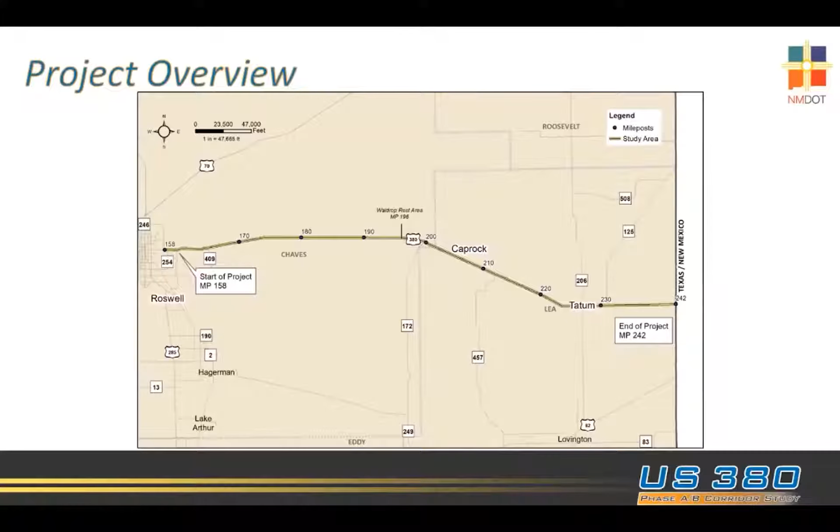Project overview. The project will commence at mile marker 158 and will proceed east and end at mile marker 242, which is at the Texas state line, over 80 miles.

The project purpose is to identify and address any existing deficiencies that might exist within the corridor, with considerations of safety, operations, access, right-of-way, environmental, public input, and costs associated with any alternatives. Project deliverables: what we're going to end up on this project is a report with any recommended improvements to the US 380 corridor. Thank you, AJ.

I'm going to talk a little bit about the existing conditions analysis that we've conducted for this project. I'll start by taking a look at the existing roadway.

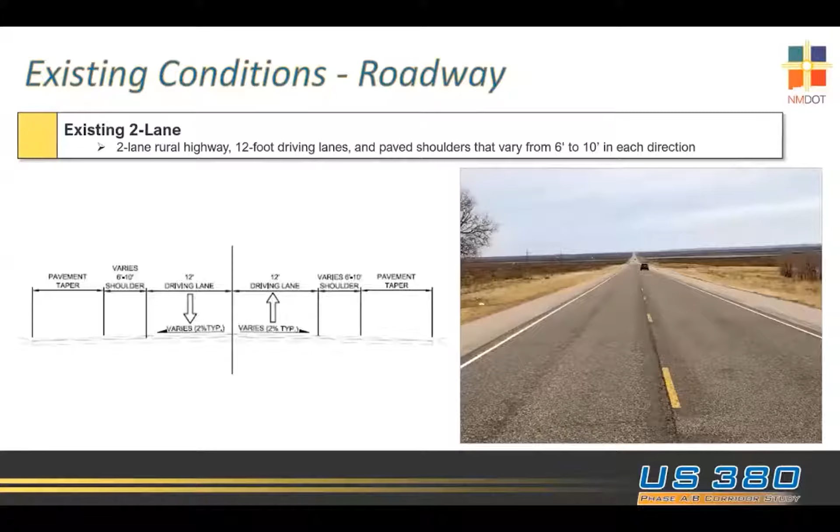Many of you probably know this corridor better than us, but we have traveled this roadway and identified this 2-lane road as a rural roadway with 12-foot driving lanes in each direction, 6 to 10-foot shoulders, and pavement tapers on the outside which provide for a safety zone.

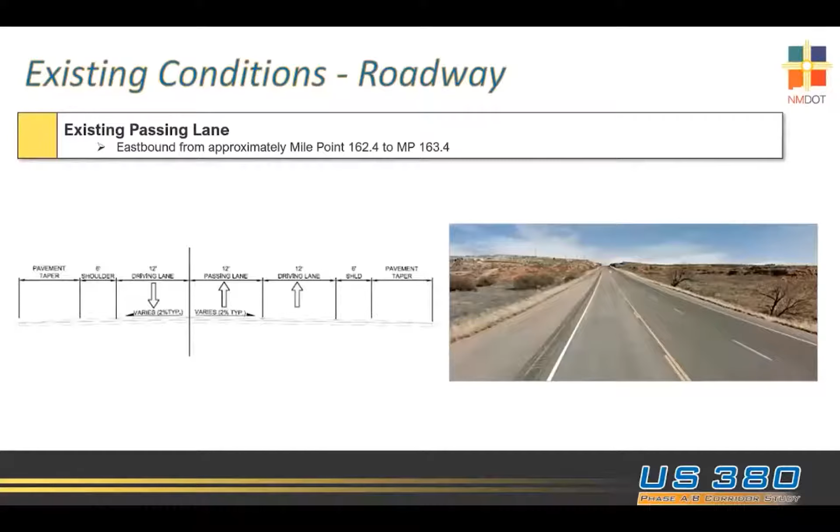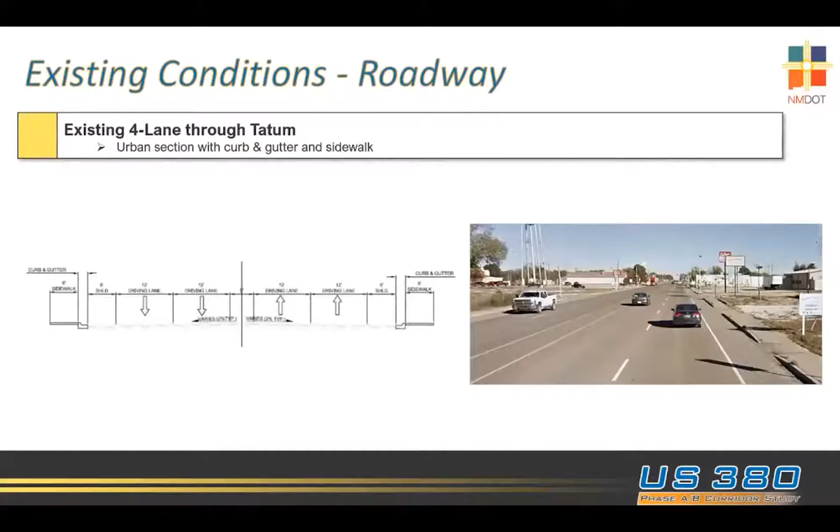There is one section between milepost 162 and 164 that is a 1-mile-long passing zone for eastbound traffic. There is also a 4-lane section through the community of Tatum, with 2 driving lanes in each direction separated by a 5-foot painted median, curb and gutter, and sidewalk on the outsides.

As we looked at this corridor, we took a look specifically at the horizontal alignment. This is the summary of the analysis that was conducted. We evaluated the route to determine how it meets current criteria for the design speed we're hoping for on this project.

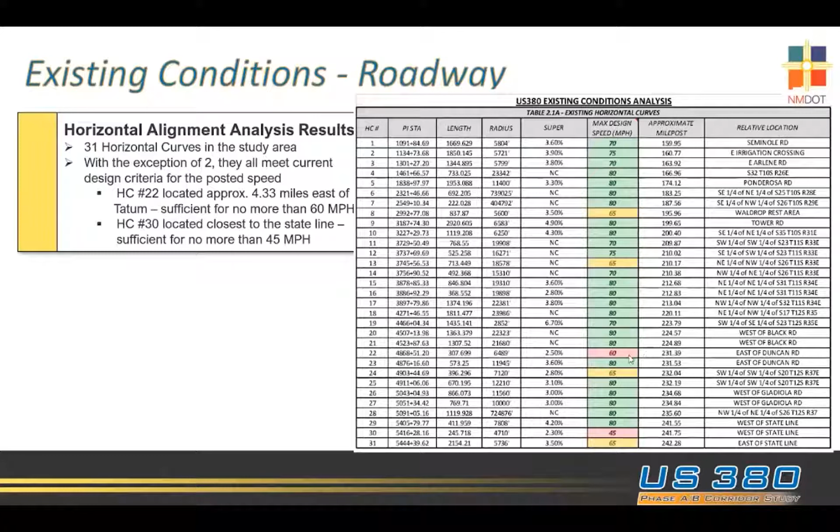There are 31 horizontal curves in the study area, and with the exception of 2 of them, all meet the design speed or the posted speed for the corridor. The 2 that do not are highlighted in pink here. Let's take a closer look at those.

The first one is located between milepost 231 and milepost 232. It has a current radius of 6,489 feet with a super elevation of 2.5%. This complies with the design speed criteria for 60 miles an hour. This area can be corrected by increasing the super elevation rate and will not require any type of realignment at this location.

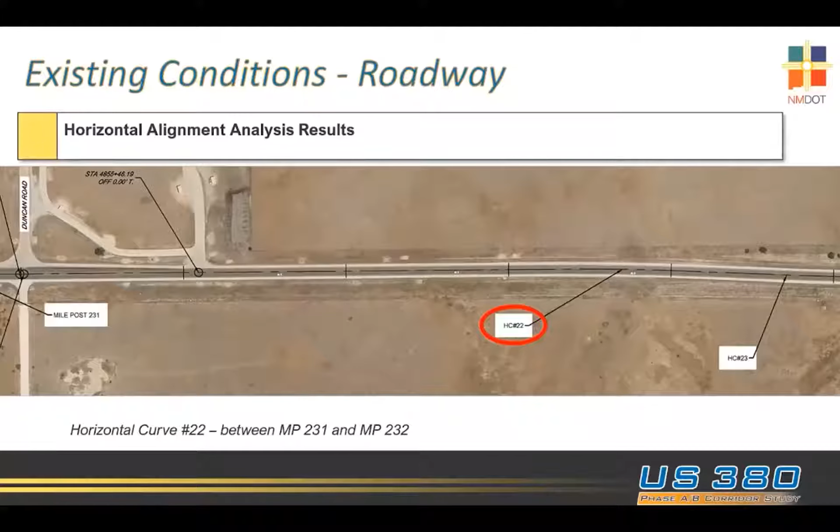The second curve that is below the posted speed is horizontal curve number 30, which is near the Texas state line, located between milepost 241 and 242. It has a current radius of 4,710 feet with a super elevation of 2.3%, which results in a design speed of about 45 miles per hour.

This one might be correctable by increasing the super elevation rate, but it may also require realignment of the road to straighten it out at this location. We will look at both these options as we start developing improvement alternatives for the project.

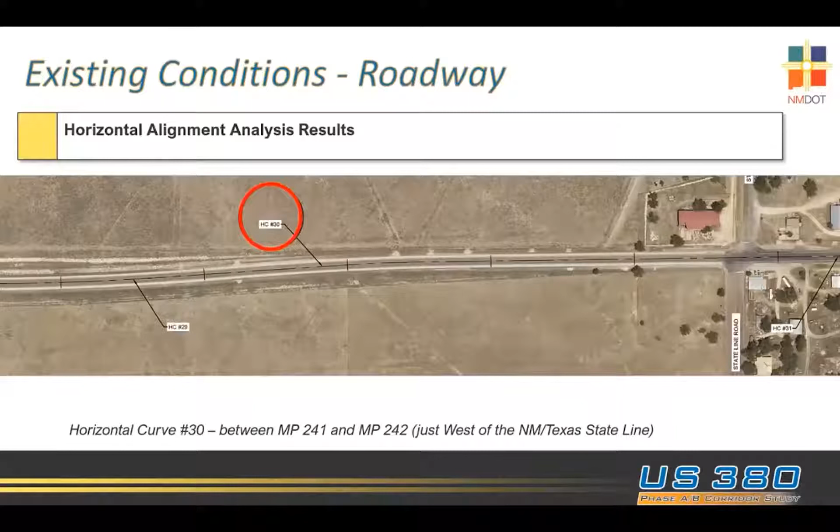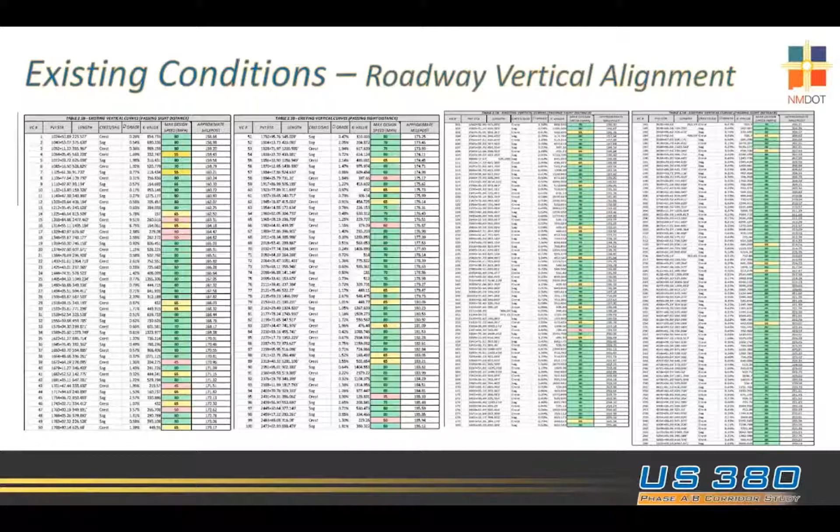Those are the ones we've highlighted in red on this table. Because it's difficult to read, we've summarized those locations into one table that only shows the areas of concern. These are the 11 we've identified as having substandard passing sight distance.

In those areas, the maximum design speed ranges from 35 miles per hour up to 60 miles per hour. Many of those areas are already being handled by striping with a solid yellow center stripe to restrict passing. The more critical safety concern is the vertical alignment that does not have adequate stopping sight distance.

Those areas are shown in the second column. There are only 2 locations where stopping sight distance is obstructed and the vertical alignment is less than the posted speed. As we start developing improvement alternatives, we'll be looking at the stopping sight distance and trying to correct those vertical deficiencies as part of our project improvements.

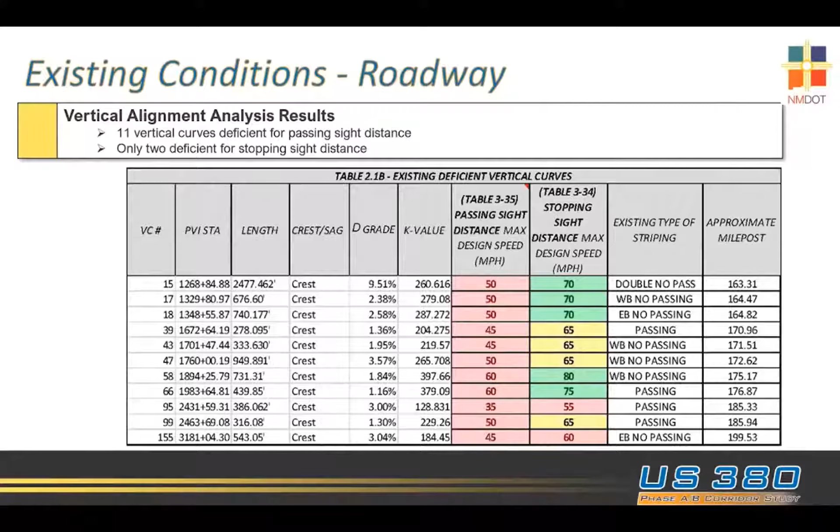The next area we looked at is the intersection sight distance. All access points have adequate sight distance except for 5 intersection locations, which are identified here. Let's take a look at each one in a little more detail.

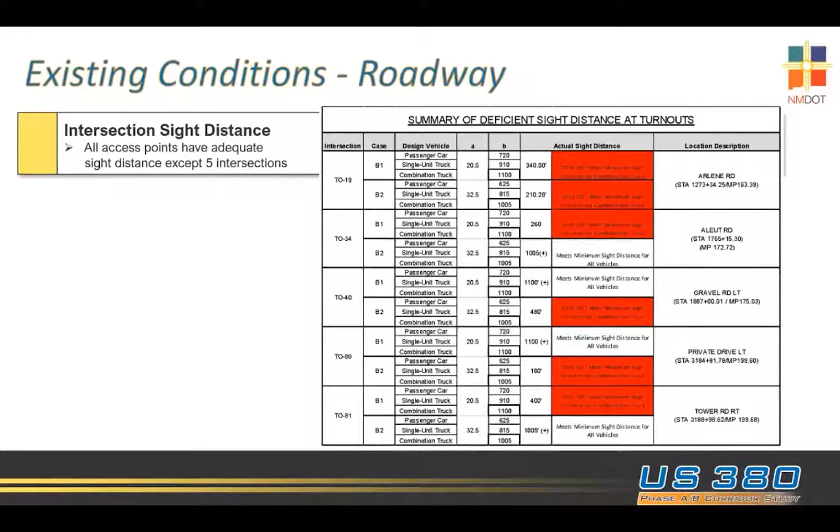This is the one at Arlene Road, located near milepost 163, between milepost 163 and 164. At this intersection, if you try to access US 380, you would have to look to the right-hand side to see oncoming traffic as you make a left turn out of this access point onto 380.

This has a deficient sight distance because the hill on the vertical curve blocks the view, preventing you from seeing far enough in advance to accelerate up to the 55-mile-an-hour speed to get in front of that traffic. The other movement is a right-hand turn coming out of this intersection.

With that movement, you would look to the left, and again because of the vertical curvature we have a blocked sight distance. Therefore, you have difficulty getting up to speed when you make a right-hand turn before you're overtaken by oncoming traffic.

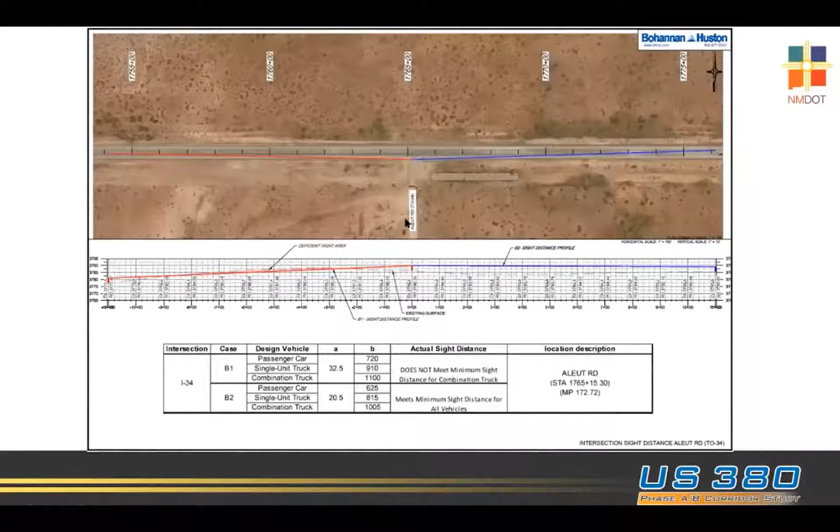The next intersection is near milepost 173, at Aleut Road. This one only has intersection sight distance deficient in one direction.

If you're coming out of this intersection wanting to make a right-hand turn, or a left-hand turn looking to the left, you're obstructed by the vertical curvature and are not able to see traffic coming to you from the Roswell area towards this intersection. The other direction has plenty of sight distance.

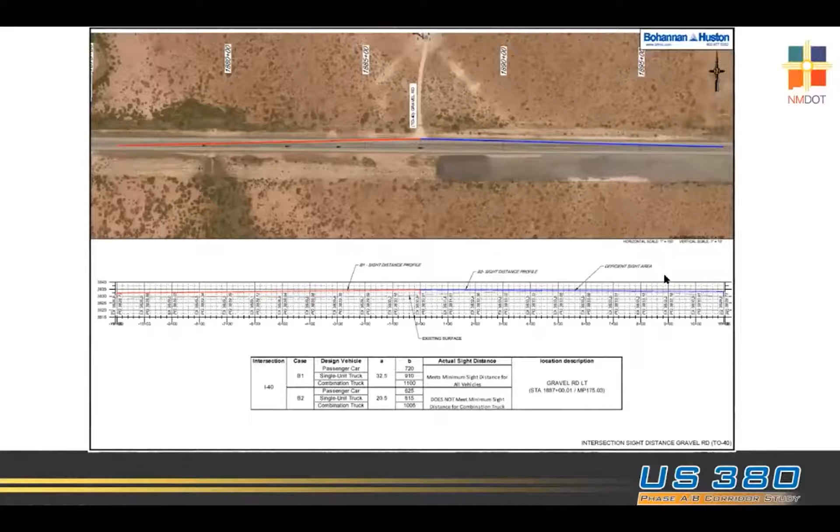The third intersection is at a gravel road located near milepost 175. This one again has a sight distance issue, this time coming from the west direction. You can see the deficient sight distance for the vertical curve looking towards the west.

The fourth is at a private drive located between milepost 199 and milepost 200. If you're coming out of this intersection, there's a vertical curve that obstructs your view as you're looking back to the east to be able to make a left-hand turn out of this intersection.

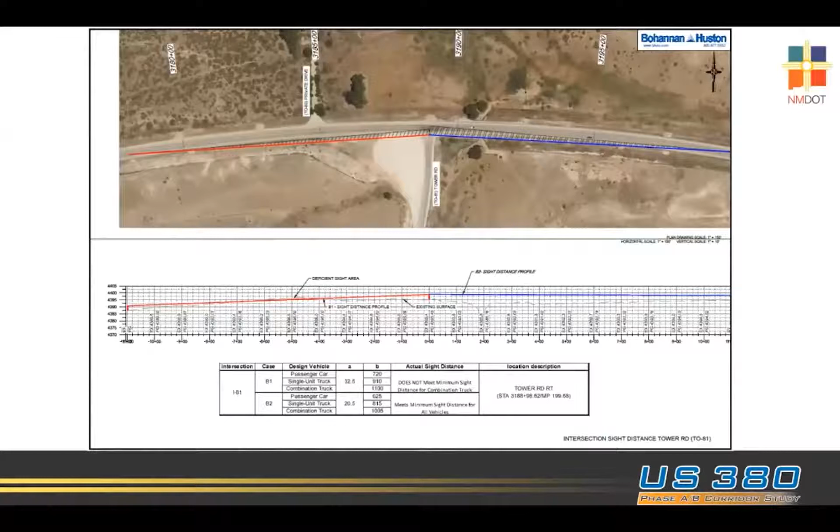The last one is just adjacent to it at Tower Road. Coming from the south on Tower Road, this one has the sight distance obstructed to the left, or coming from the Roswell area, making it difficult to get a left turn out or make a right turn maneuver out of this intersection. All of these intersection sight distance issues will be looked at as part of our improvement alternatives to identify how we would mitigate this and make these intersections safer.

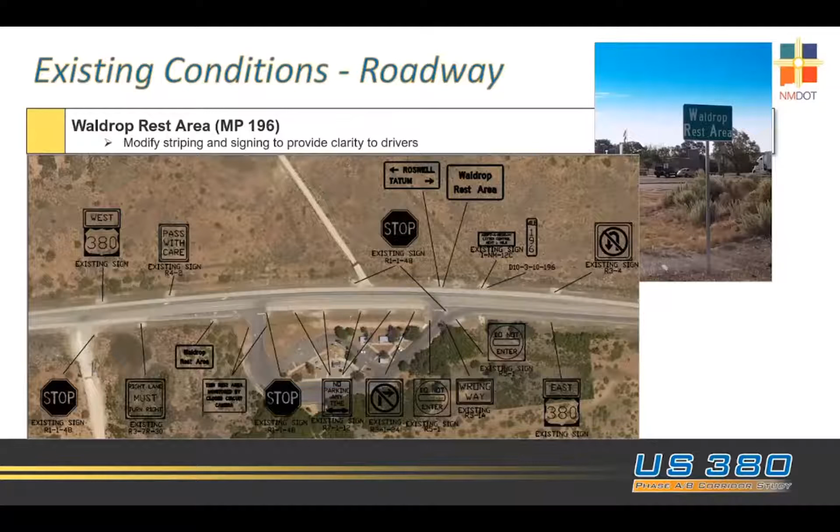Although this is not truly an intersection, another area we will be looking at is the Waldrop Rest area. We have received feedback that this location causes some confusion for unfamiliar drivers, and in driving it myself, I noticed a level of discomfort as I was traveling through here. There's nothing really wrong with the existing signing and striping, but we will review this existing layout to determine if there are any signing or striping improvements we can recommend to provide better direction for drivers at this location.

Near the beginning of the project limits, just outside of Roswell, the daily traffic volumes are approximately 3,000 vehicles per day. Towards the middle of the project limits, they reduce down to approximately 2,000 vehicles per day. Then at the east end of the corridor, near the Texas state line, the daily volumes are approximately 2,500 vehicles per day. We also estimated traffic volumes expected in 20 years.

For this link in the corridor, the capacity analysis resulted in a level of service B for both the existing and the 2040 traffic projection volumes. The rest of the corridor is a level of service A. What this is telling us is that the two-lane rural road typical section has adequate capacity for both the existing traffic and will still continue to operate acceptably with the projected 20-year traffic volumes. We don't have any capacity issues on this highway.

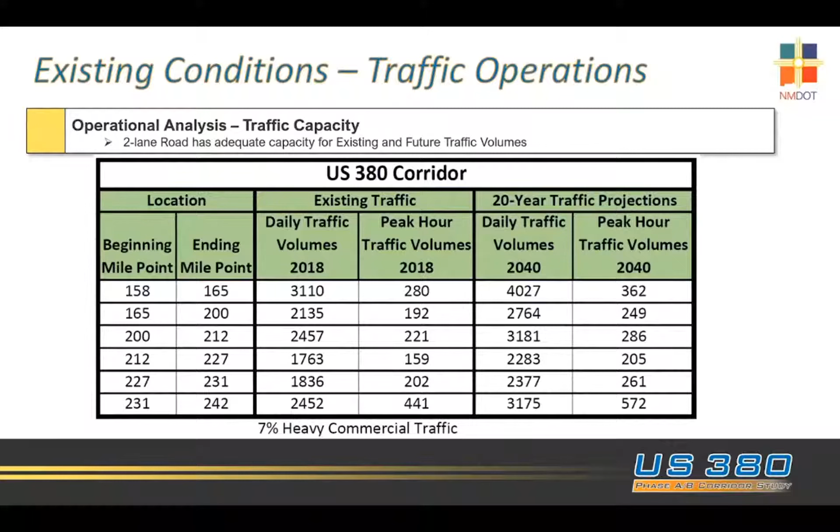The other analysis our team conducted was a safety analysis. This starts with an assessment of the existing crashes that have occurred within the project corridor limits. The NMDOT has crash data for the years 2015, 2016, 2017, and 2018 that they were able to provide to us. We took a look at the statistics for crash types, frequency, and severity. We looked at where these crashes are occurring and whether there are any trends we can use to identify potential problem areas. I'm going to show you some exhibits of these analyses.

The other thing we've done is evaluate the crash data using methodologies from the Highway Safety Manual. As we move forward with the development of alternatives, we will use predictive crash analysis to estimate the expected reduction in crashes based on the improvements that we consider.

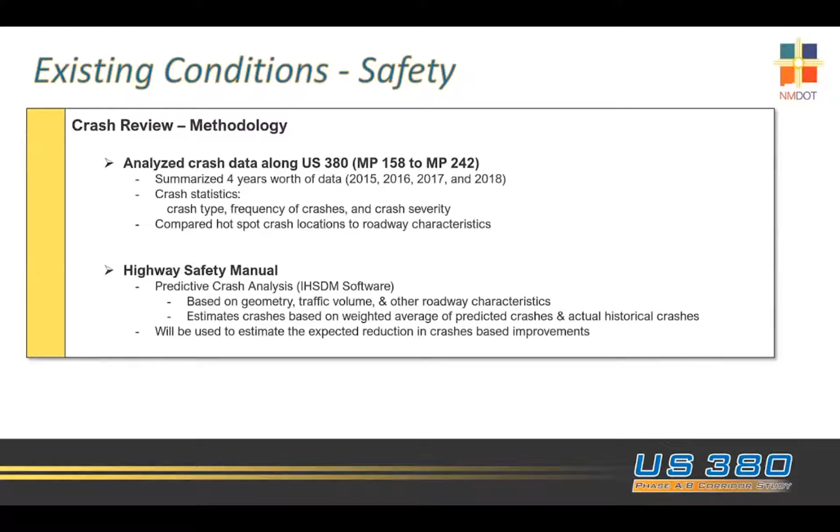This summary shows the crash rates for the 6 segments of the corridor. The highest crash rate is the section closest to Roswell, just west of the 409 intersection.

Even though this crash rate is 111.9 crashes per million vehicle miles traveled, it is less than the statewide average of 159.5, and less than the countywide averages.

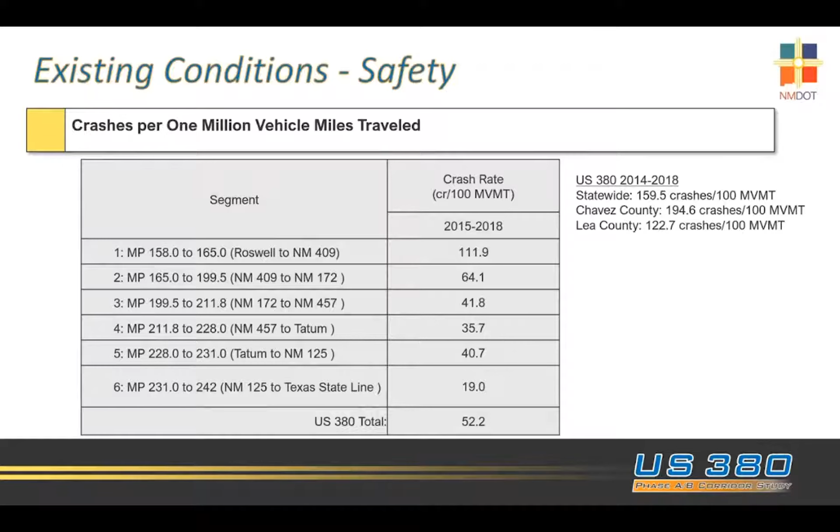The other segments of the corridor are lower, and the overall average for this 84-mile corridor is 52.2 crashes per million vehicle miles traveled. Even though these crash rates are not high compared to other crash rates, some characteristics drew our attention.

One of the things we looked at is where these crashes are occurring. This heat map shows where the crashes are concentrated. The corridor hotspot is near milepost 160, just east of Roswell. The other areas in pink are hotspots along the corridor that we will continue reviewing more closely as we develop our alternatives.

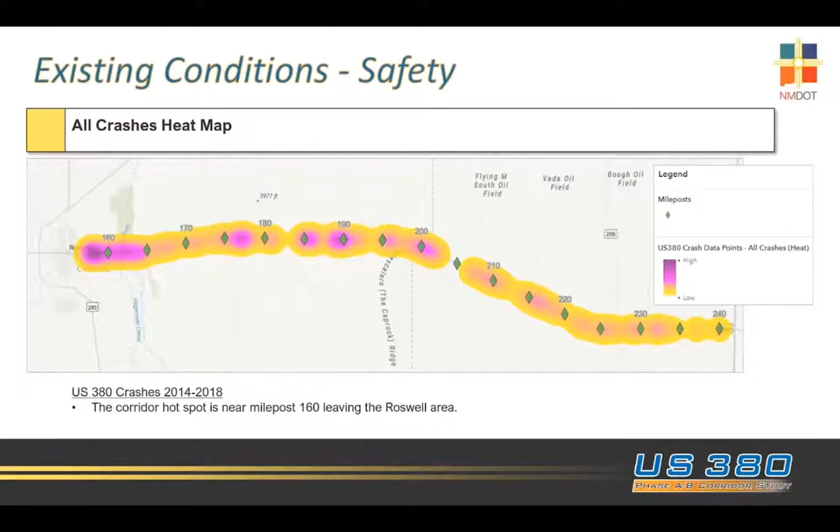The other factors we want to review are the crash types. This table shows the different crash types by year and summarizes what percentage of overall crashes each type represents. The highest is animal-related crashes, contributing to 33% of the overall crashes in the corridor. Rollover crashes are at 23%, and 11% of the crashes were head-on crashes.

Another statistic everyone is concerned about is crashes related to DWI. In this corridor, 9% of all crashes were due to impaired driving, and 14% of the rollover crashes resulted from driving while impaired.

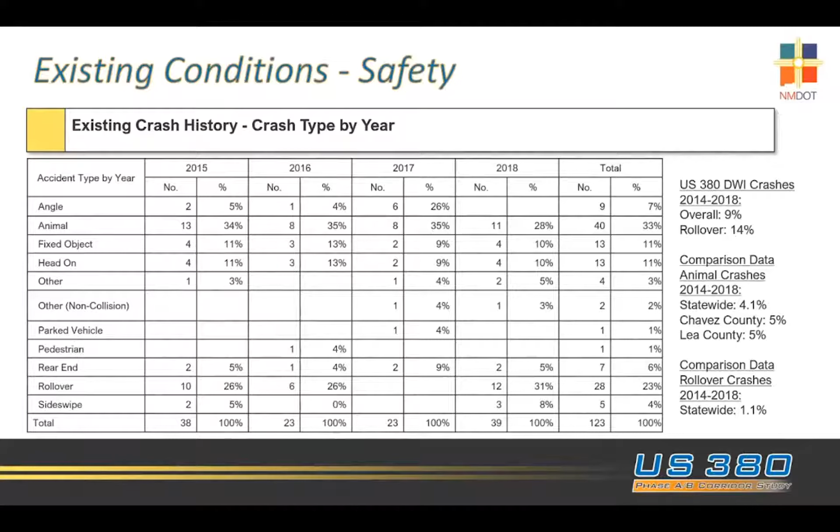As we look at the animal crashes, this map shows where they occurred within the corridor. The majority involved deer, and most took place during dark conditions. But as you can see by the highlighted pink areas, there are a few concentrated areas that need to be looked at. Animal crashes on this corridor were at 33%,

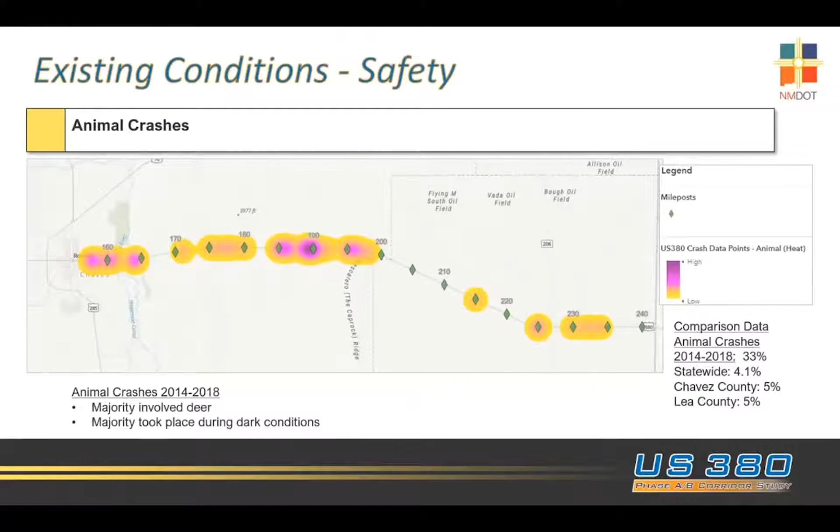which is much higher than the statewide average and the county averages when you look at crashes associated with animals crossing the roadway. One of the other items we looked at is rollover crashes.

Again, the areas in pink highlight where the concentration of those rollovers occurred. Some of the top contributing factors included defective tires, driver inattention, alcohol or drug involvement, and excessive speeds.

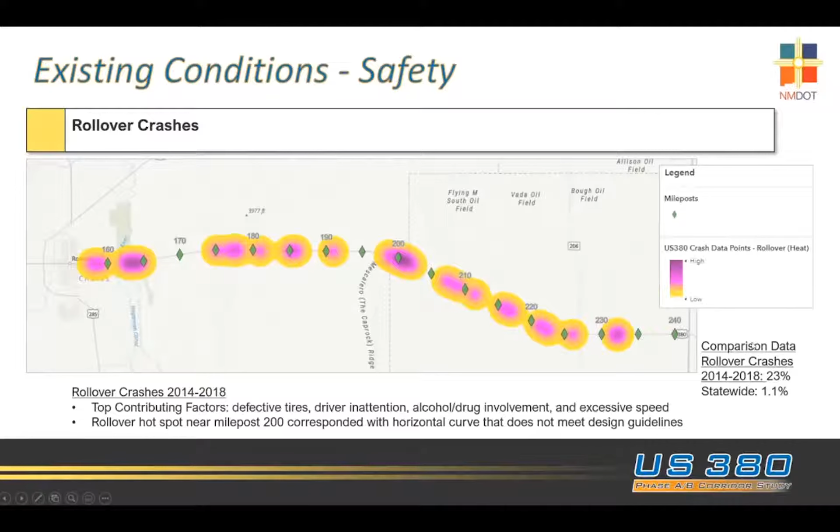The rollover hotspot that really caught our eye was at milepost 200, which corresponds with a horizontal curve that doesn't meet the design guidelines. Again, 23% of the crashes in this corridor are rollover crashes, which is much higher than the statewide average of 1.1%.

So we'll continue looking at these areas to see if there are any improvements we can make to minimize illegal passing or poor passing decisions made by travelers.

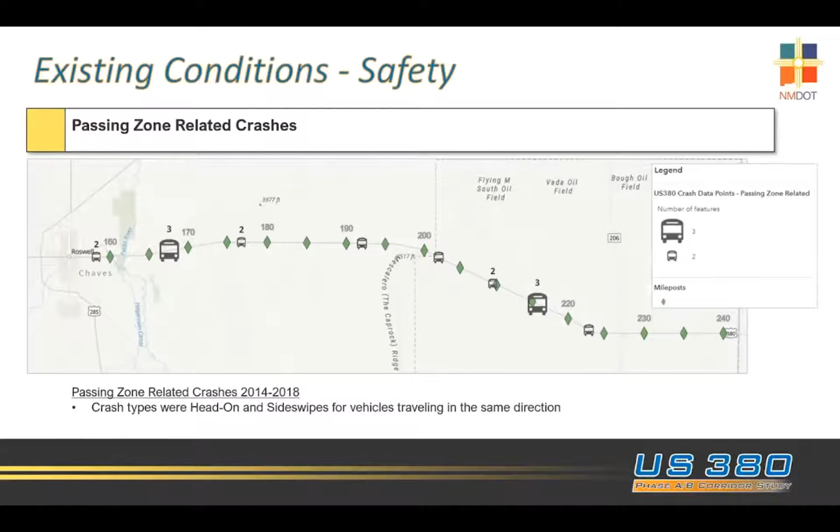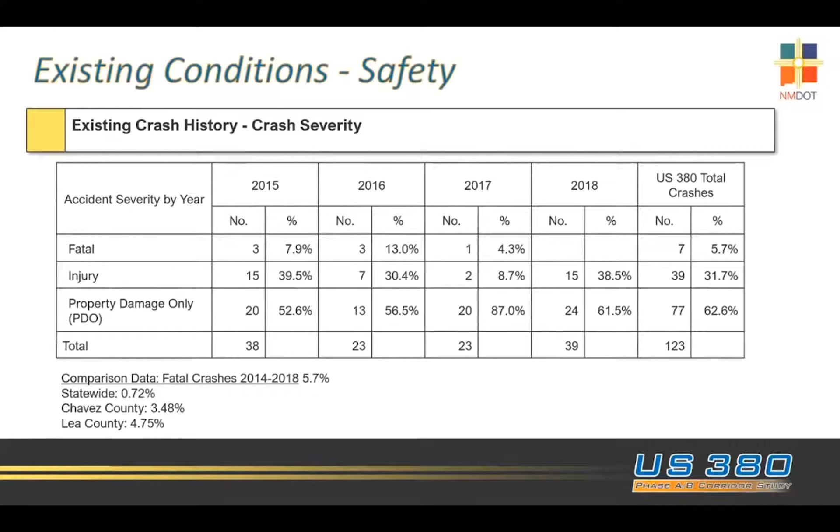So if you look at the fatal crashes, that's 5.7% of the crashes being fatal, much higher than the statewide or county averages. The idea is to figure out how to improve this corridor to eliminate fatalities and reduce the number of crashes and injury-related crashes.

In summary, there are some safety issues within the corridor that we will try to mitigate with improvements. We will focus on the areas shown by the hotspots along the corridor. There also seems to be some correlation between the inability of traffic to pass, and when they can't pass safely, there is a potential for head-on crashes, sideswipe crashes, and possibly rollover crashes.

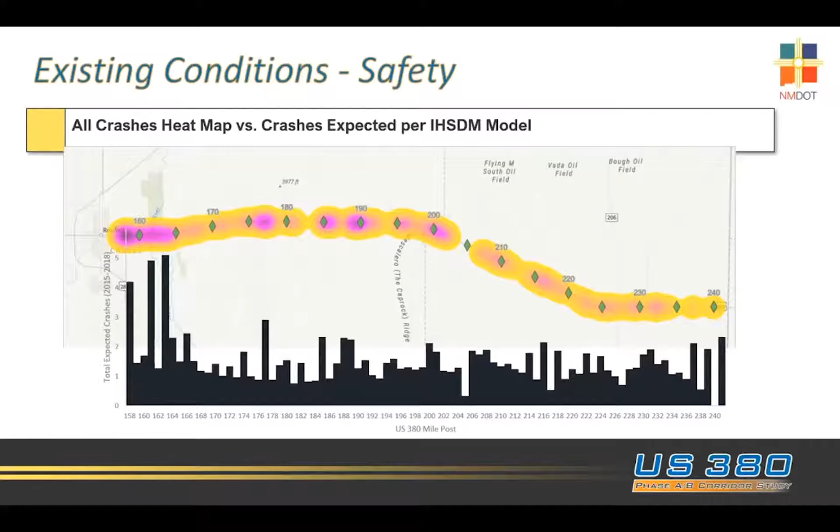There seems to be a higher incidence of animal crashes than we see on other corridors, so we'll take a look at these different factors in the locations where they occur as we develop alternatives. This map summarizes where some of the key safety areas are along the corridor, and these are the areas we will focus on as we develop our alternatives.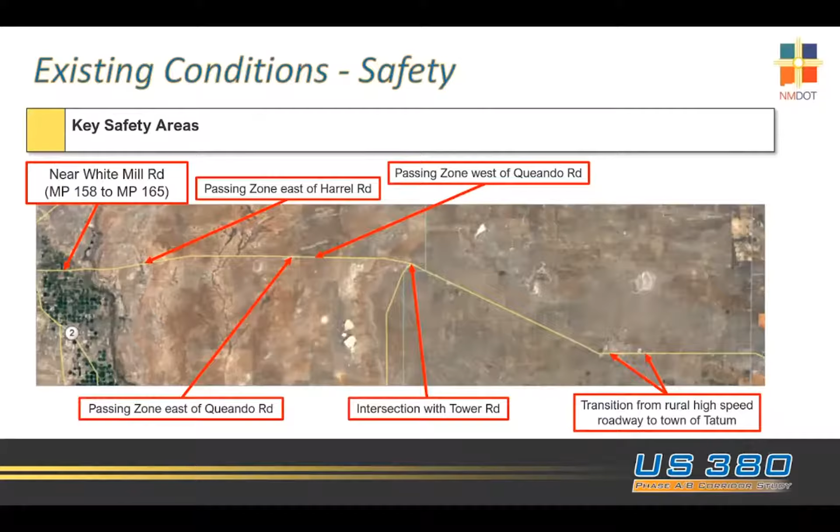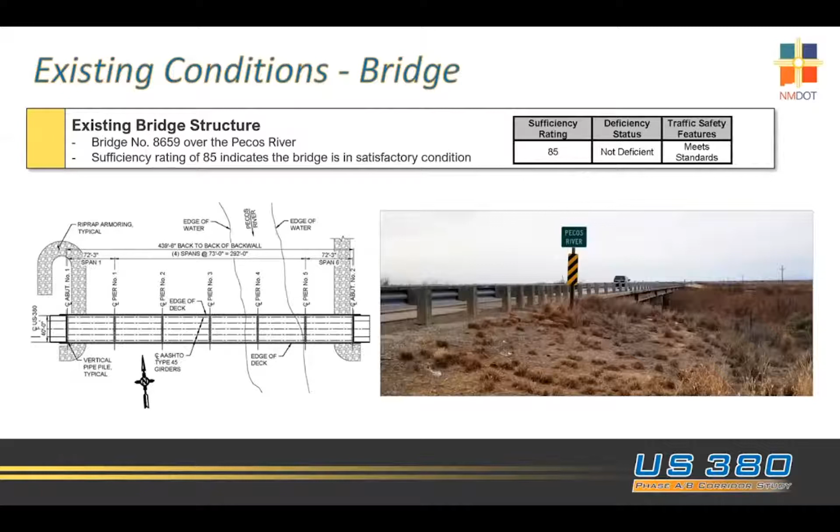We have identified a few maintenance items that are needed on the bridge, but other than that, there are no problems with this existing structure.

We have also completed an inventory of the existing drainage structures that cross under the highway. There are 124 drainage structures in this corridor. 84 of them are culvert pipes, ranging in size from 24 inches up to 48 inches.

There are 31 concrete box culverts, and there are 8 major structures, which are a combination of multi-barrel concrete box culverts or multi-plate corrugated metal pipes. And as I mentioned, there is the one bridge structure over the Pecos River.

Most of these structures are in good condition. Most of the culverts have concrete blankets. Some of the larger culverts have safety grates. There is evidence of minimal silt, sedimentation, or debris in almost all of the culvert crossings.

We are in the process of reviewing them for corrosion, but do not expect corrosion to be an issue in this corridor. There is one concrete box culvert located between mileposts 218 and 219, which seems to be primarily used for livestock crossing and is not for drainage purposes.

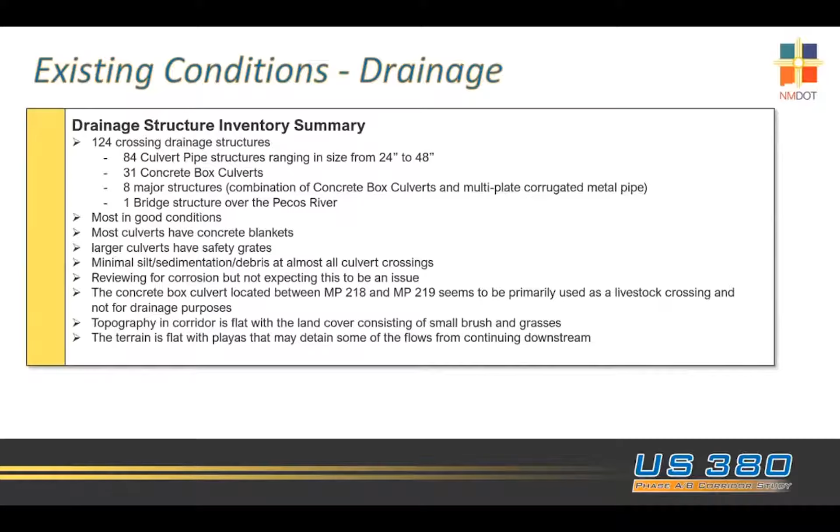The topography in the corridor is flat, with the land cover consisting of small brush and grasses. The terrain is relatively flat with playas that may detain some of the flows from continuing downstream.

Our team also started researching the existing utilities along the corridor. This is the list of the current utility owners within the corridor limits. We have contacted utility owners to request records of the existing utilities and will be evaluating these utilities for any potential conflicts as we start developing our alternatives.

Here are some of the facts of the existing utility research. In the areas around Roswell and Tatum, we see more utilities than in the rest of the corridor. Typical utilities such as water, sewer, electrical, and then there's also some fiber optic communication lines within those areas.

In the rural areas of the corridor, there are communication lines and electrical lines that parallel the roadway, but most of them are located outside of the edges of the roadway near the right-of-way lines.

There is evidence of petroleum and natural gas pipelines that cross the highway, and these crossings are scattered throughout the project length. If any of the alternatives have the potential to impact any of these utilities, we will work with the utility owners to identify those impacts and the potential for relocation of their facilities if needed.

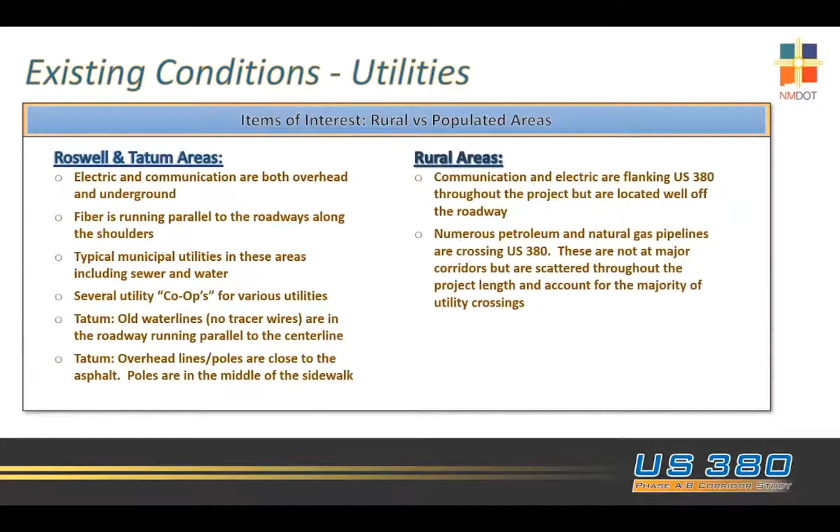Now let me talk a little bit about the existing environmental conditions. There is approximately 3 acres of wetlands located in the study area, in and around the Pecos River. Outside of this wetland and riparian habitat, the area is characterized by Chihuahuan desert grasslands, shinnery oak sands, and grassland prairies.

This ecosystem provides habitat for over 52 observed species of invertebrates, 3 fish, 5 reptiles, 44 birds, and 14 mammals, as well as over 250 different plant types.

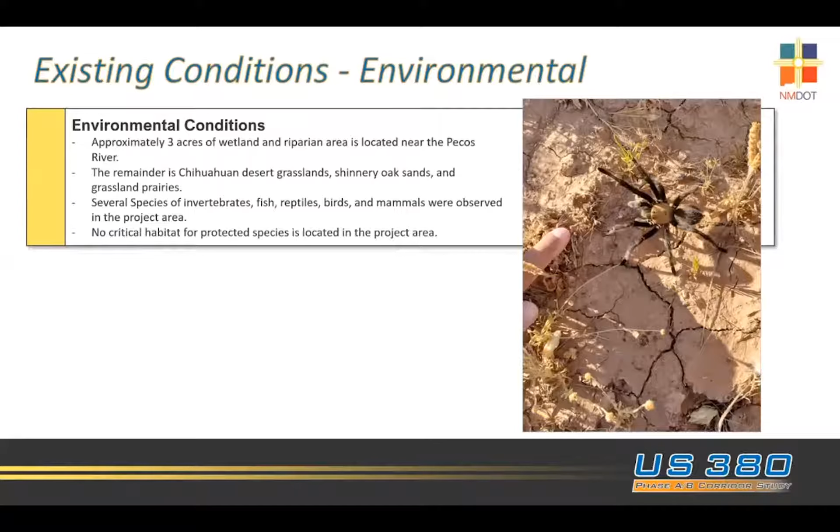Despite this diversity of habitat, there is no designated critical habitat within the project area for species protected by the Endangered Species Act. We do not anticipate any of our alternatives to be impacting these natural resources, but a more detailed evaluation will be conducted in the next phase of this project.

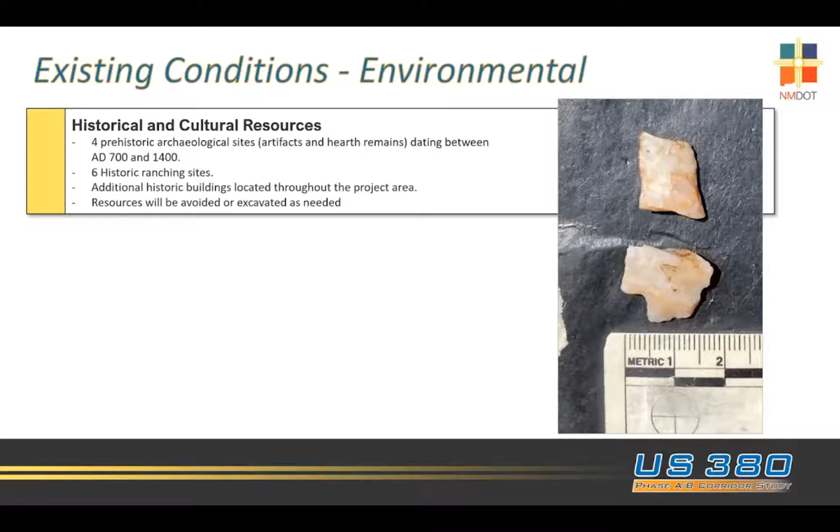There are 10 archaeological sites that were identified within the project area, including prehistoric sites dating from 700 to 1400 AD, as well as historic ranching sites and other historic buildings, and features such as irrigation canals and bridges. All of these resources will either be avoided by the project or will undergo archaeological excavation prior to construction.

Additional considerations include the substantial amount of BLM and state land office land located throughout the project area. In addition, the Bitter Lake National Wildlife Refuge and Mescalero Sands Recreation Area are located adjacent to the project.

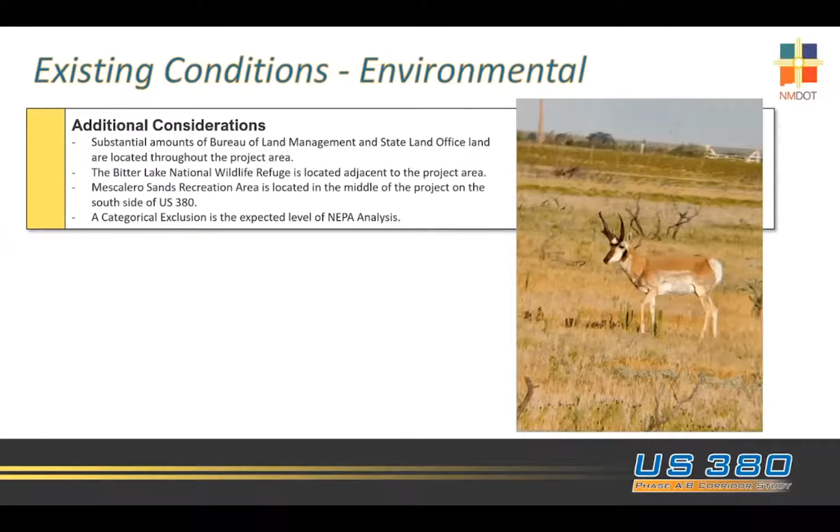There will be no need to impact these areas as a result of the project, and a categorical exclusion is the anticipated level of analysis that we feel will be required for the National Environmental Policy Act documentation. That concludes our finding for the existing conditions.

Now let me talk about the process we are following for this corridor study. The study is being conducted in accordance with the NMDOT location study procedures, which were developed to comply with the NEPA requirements. The study process includes an initial evaluation of alternatives, a detailed evaluation of alternatives, and an environmental investigation. We are at the beginning of this process.

We have just finished the evaluation of existing conditions and are going to start looking at development of potential improvement alternatives. We still have to complete the detailed engineering evaluation and the environmental analysis before we can tell you what proposed improvements will be for this US 380 corridor.

I also want to point out this process includes continual public involvement through a comprehensive public outreach program from the start through the finish. The study process is only a portion of the overall development project.